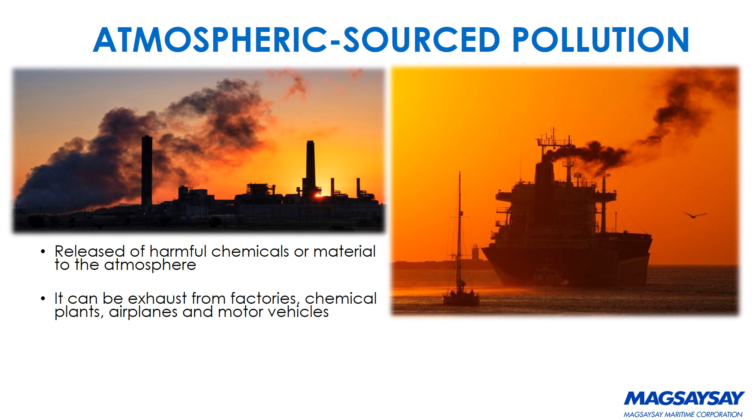Atmospheric-sourced pollution. This type of pollution releases harmful chemicals or material to the atmosphere. It can be exhaust from factories, chemical plants, airplanes and motor vehicles.

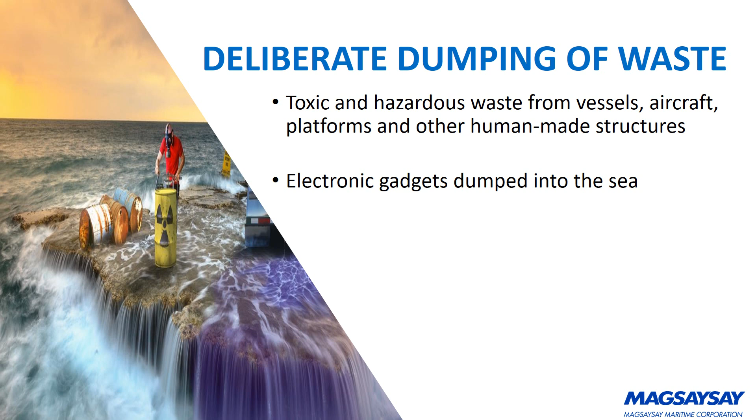Deliberate dumping of waste, toxic and hazardous waste from vessels, aircraft, platforms and other human-made structures. Electronic gadgets dumped into the sea.

Noise pollution: environmental noise that interferes with the ability of marine animals to hear natural sounds in the ocean. This can be from military sonar, oil exploration, and industrial commercial shipping.

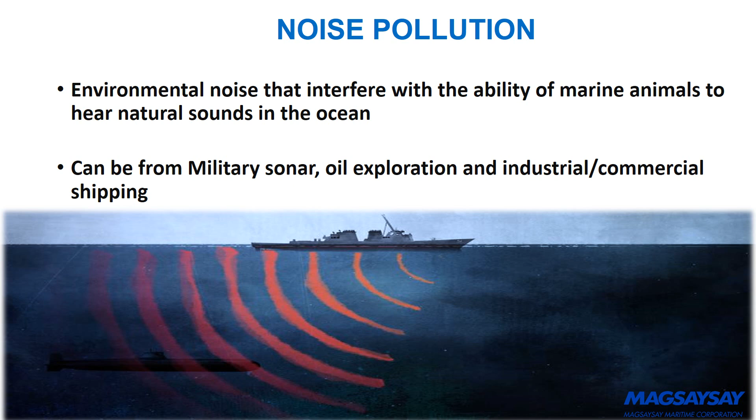Ship-sourced marine pollution. There are two types of ship-sourced marine pollution. First is operational pollution, which for example comes from routine tank cleaning operations. Next is accidental pollution, which is the result of sudden events, independent of human will. It may, for example, occur following the rupture of a pipeline, a fire, or a shipwrecking.

Where does the operational ship-sourced marine pollution come from? It may come from the following sources: atmospheric discharges from ship's fuel, oil from machinery and cargo spaces, chemical and other harmful substances carried as cargo, sewage, toxic substances carried in package form, and garbage.

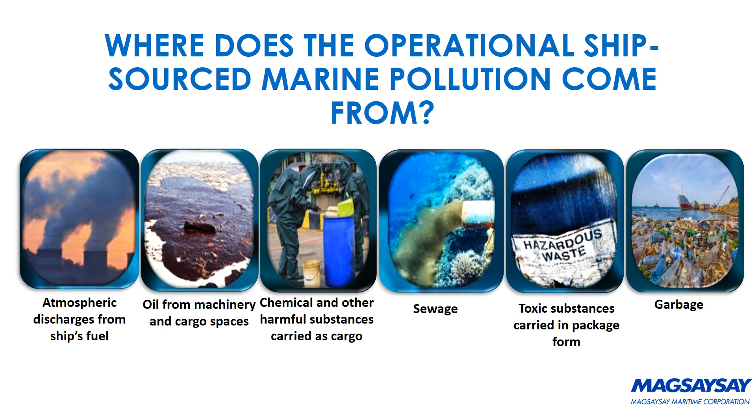How do countries address ship-sourced pollution? Governments of the different countries in the world, through the International Maritime Organization, have created the International Convention for the Prevention of Pollution from Ships in 1973, as amended by the Protocol of 1978, or Marpol 73/78.

Marpol Convention. Marpol, a short form for marine pollution, is also the name of an international convention for the prevention of environmental pollution from any sea-going vessel. Better known as Marpol 73/78.

The agreement came into effect on the 2nd of October 1983 at the headquarters of the International Maritime Organization, or IMO, in London, England. The main aim for implementing Marpol was to minimize the pollution of the seas, which mainly occurs because of dirty oil, exhaust gases, and hazardous chemicals from ships.

The Marpol Convention provides utmost importance to the marine environment by completely eliminating the usage of any type of substances that can prove harmful to the environment.

Marpol Convention. The convention includes regulations aimed at preventing and minimizing pollution from ships, both accidental pollution and that from routine operations. It currently includes 6 technical annexes.

Annex 1: Prevention of pollution by oil. Annex 2: Control of pollution by noxious liquid substances in bulk. Annex 3: Pollution by harmful substances carried by sea in packaged form. Annex 4: Pollution by sewage from ships. Annex 5: Pollution by garbage from ships. Annex 6: Air pollution from ships.

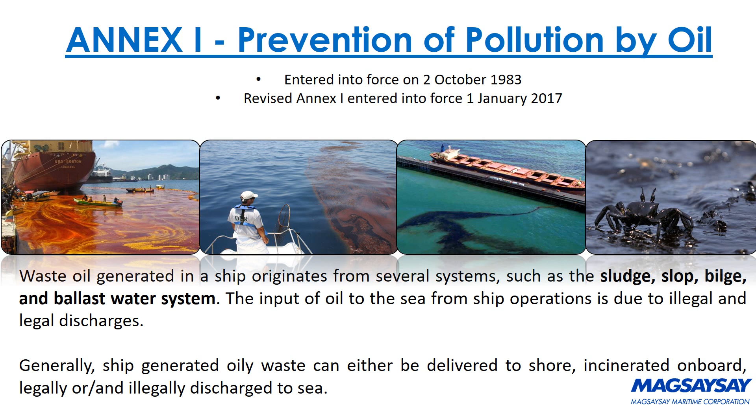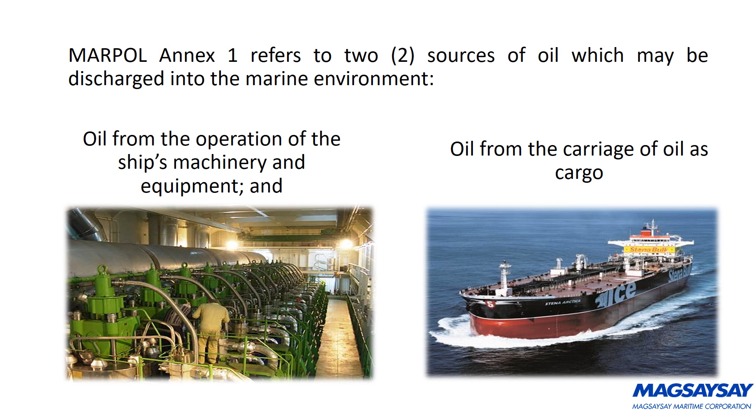Marpol Annex 1 refers to two sources of oil which may be discharged into the marine environment: oil from the operation of the ship's machinery and equipment, and oil from the carriage of oil as cargo. Oil from routine ship's operations discharge requirements.

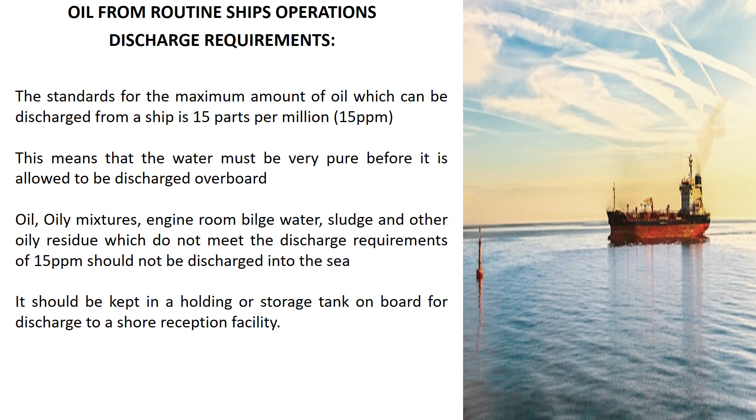The standard for the maximum amount of oil which can be discharged from a ship is 15 parts per million, or 15 ppm. This means the water must be very pure before it is allowed to be discharged overboard. Oil, oily mixtures, engine room bilge water, sludge, and other oily residue which do not meet the discharge requirement of 15 ppm should not be discharged into the sea.

It should be kept in a holding or storage tank on board for discharge to a shore reception facility. Oil filtering equipment, also known as oily water separators (OWS): any ship of 400 gross tonnage and above shall be fitted with oil filtering equipment, of a design approved by the administration. It shall be provided with an alarm arrangement to indicate when the required level cannot be maintained, and any discharge of oily mixtures is automatically stopped when the oil content of the effluent exceeds 15 parts per million.

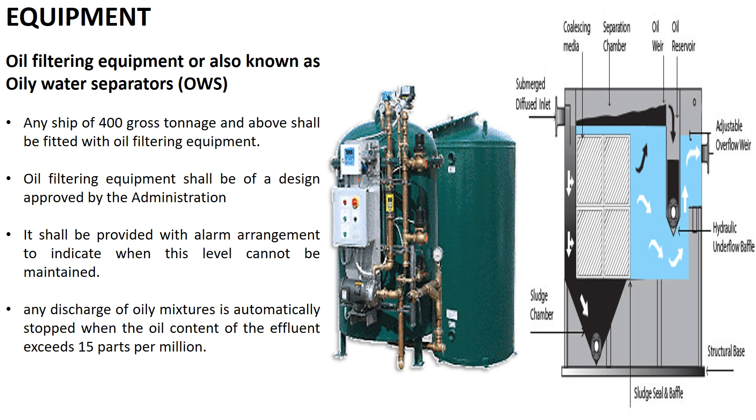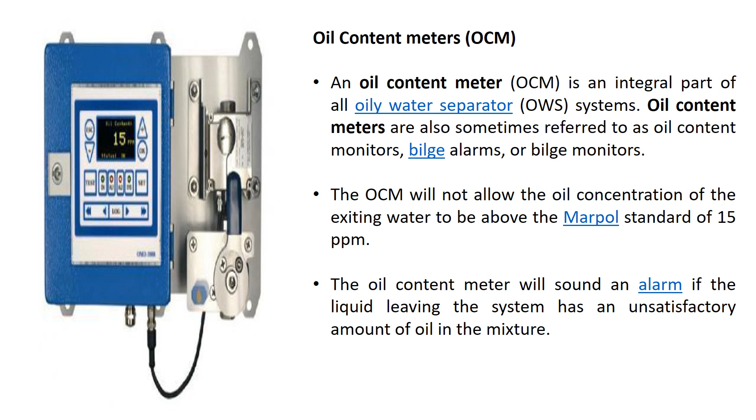Oil content meters (OCM): an oil content meter is an integral part of all oily water separator systems. OCM are also sometimes referred to as oil content monitors, bilge alarms, or bilge monitors. The OCM will not allow the oil concentration of the exiting water to be above the Marpol standard of 15 ppm. The oil content meter will sound an alarm if the liquid leaving the system has an unsatisfactory amount of oil in the mixture.

Shipboard Oil Pollution Emergency Plan, or SOPEP: every oil tanker of 150 gross tonnage and above, and every ship other than an oil tanker of 400 gross tonnage and above, shall carry on board a shipboard oil pollution emergency plan, approved by the administration. As a seafarer, you are required to be very familiar with your ship's SOPEP.

The procedure to be followed by the master, or other persons having charge of the ship, to report an oil pollution incident. The list of authorities or persons to be contacted in the event of an oil pollution incident. A detailed description of the action to be taken immediately by persons on board to reduce or control the discharge of oil following the incident. Procedures and point of contact on the ship for coordinating shipboard action with national and local authorities in combating the pollution.

Oil Record Book, ORB Part 1. Every oil tanker of 150 gross tonnage and above, and every ship of 400 gross tonnage and above other than an oil tanker, shall be provided with an Oil Record Book, Part 1, Machinery Space Operations. The Oil Record Book, whether as a part of the ship's official log book or otherwise, shall be in the form specified in Marpol.

The Oil Record Book, Part 1, shall be kept in such a place as to be readily available for inspection at all reasonable times. It shall be preserved for a period of 3 years after the last entry has been made. If you are working in the engine room of any ship, you must fill up the ORB1.

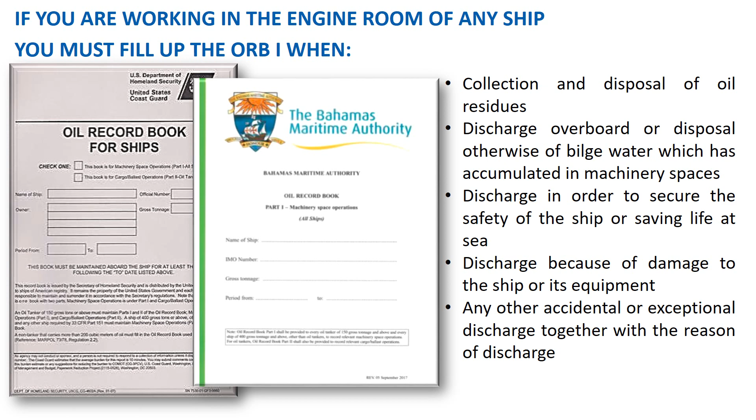Collection and disposal of oil residues. Discharge overboard, or disposal otherwise, of bilge water which has accumulated in machinery spaces. Discharge in order to secure the safety of the ship, or saving life at sea. Discharge because of damage to the ship or its equipment. Any other accidental or exceptional discharge, together with the reason for discharge.

Fully and immediately record the operation once it is completed. Have the officers in charge sign the entry once the operation is completed. Remember, it is very important to follow your ship's rules and regulations governing the OWS systems and its procedures, to ensure the oil sensing device works. If you do not know how to operate the OWS systems, ask your senior officer and your superintendent.

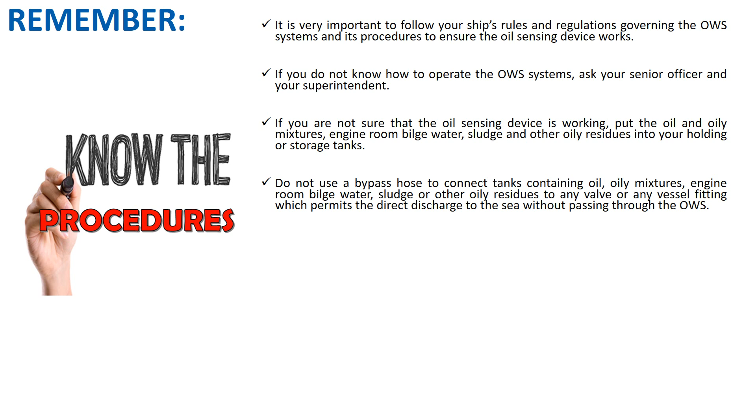If you are not sure that the oil sensing device is working, put the oil and oily mixtures, engine room bilge water, sludge and other oily residues into your holding or storage tanks. Do not use a bypass hose to connect tanks containing oil, oily mixtures, engine room bilge water, sludge, or other oily residues to any valve or vessel fitting which permits direct discharge to the sea without passing through the OWS.

Remember, the use of a bypass hose, or magic hose, is illegal. It is subject to very severe penalties. A seafarer who uses, or who consents to the use of, a bypass hose or magic hose, shall suffer the consequences, which may include revocation of his license. If you notice anybody using a bypass hose or magic hose, immediately report him to the captain. If you feel that no one is listening to you, immediately call your principal through his hotline.

Be truthful. You must record accurately and truthfully all routine ship operations involving oil in the ORB1. It is illegal to make untrue entries in the oil record book. Do not tamper with or use any means or method to distort the functioning of the oil content meter or oil detection device.

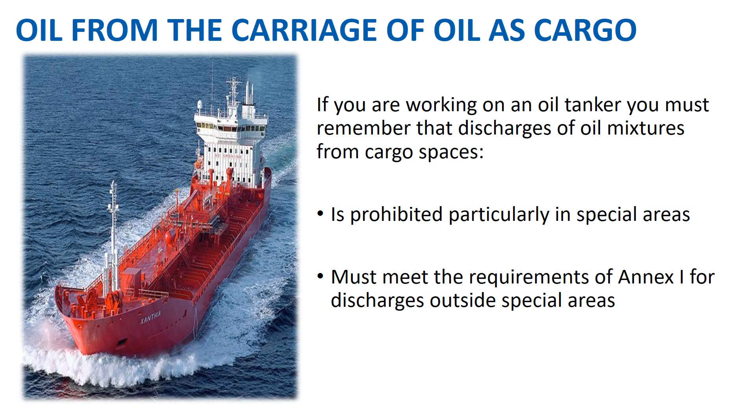If you are working on an oil tanker, you must remember that discharges of oil mixtures from cargo spaces are prohibited, particularly in special areas. Must meet the requirements of Annex 1 for discharges outside special areas.

Discharge requirements, discharges outside special areas. Any discharge into the sea of oil or oily mixtures from the cargo area of an oil tanker shall be prohibited except when all the following conditions are satisfied: the tanker is not within a special area, the tanker is more than 50 nautical miles from the nearest land, the tanker is proceeding en route, and the instantaneous rate of discharge of oil content does not exceed 30 liters per nautical mile.

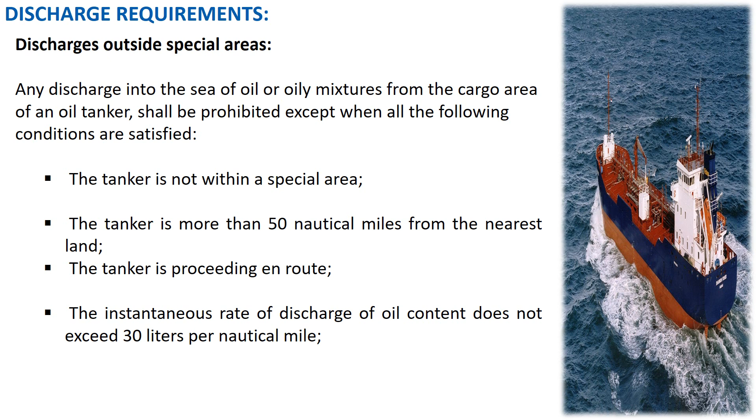Discharge requirements. Discharges outside special areas. Any discharge into the sea of oil or oily mixtures from the cargo area of an oil tanker shall be prohibited except when all the following conditions are satisfied. The total quantity of oil discharged into the sea does not exceed, for tankers delivered on or before the 31st of December 1979...

1/15,000 of the total quantity of the particular cargo of which the residue formed a part, and for tankers delivered after the 31st of December 1979, 1/30,000 of the total quantity of the particular cargo of which the residue formed a part. The tanker has in operation an oil discharge monitoring and control system, and a slop tank arrangement, as required by this annex. The provisions of this regulation shall not apply to the discharge of clean or segregated ballast.

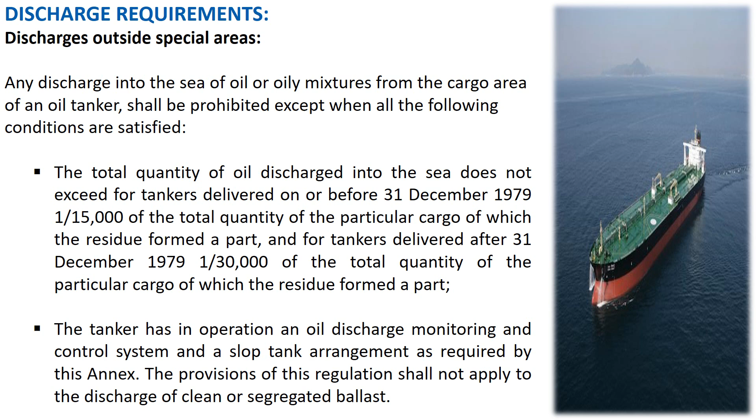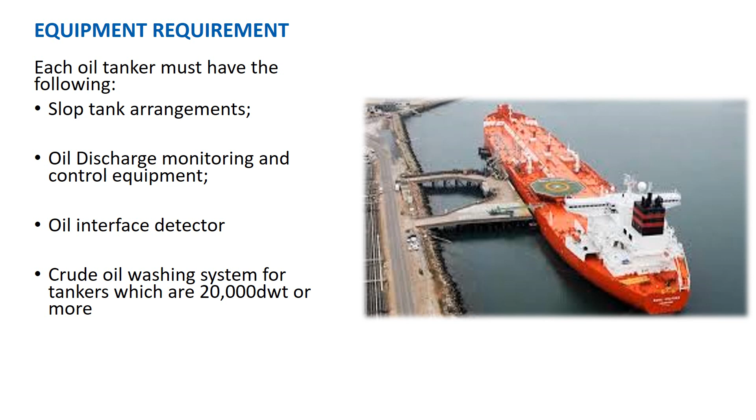Equipment requirement. Each oil tanker must have the following: slop tank arrangements, oil discharge monitoring and control equipment, oil interface detector, and crude oil washing system for tankers which are 20,000 deadweight tonnage or more.

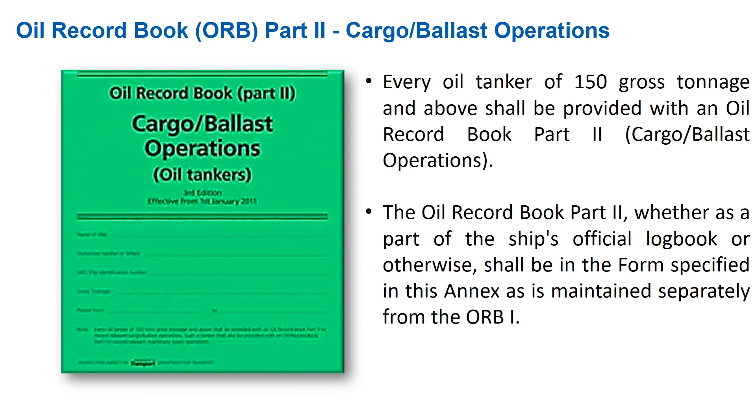Oil record book ORB Part 2: cargo or ballast operations. Every oil tanker of 150 gross tonnage and above shall be provided with an oil record book Part 2, cargo or ballast operations. The oil record book Part 2, whether as a part of the ship's official logbook or otherwise, shall be in the form specified in this annex, as it is maintained separately from the ORB1.

You must fill up the oil record book 2. The oil record book Part 2 shall be completed on each occasion, on a tank-to-tank basis if appropriate, whenever any of the following cargo or ballast operations take place in the ship:

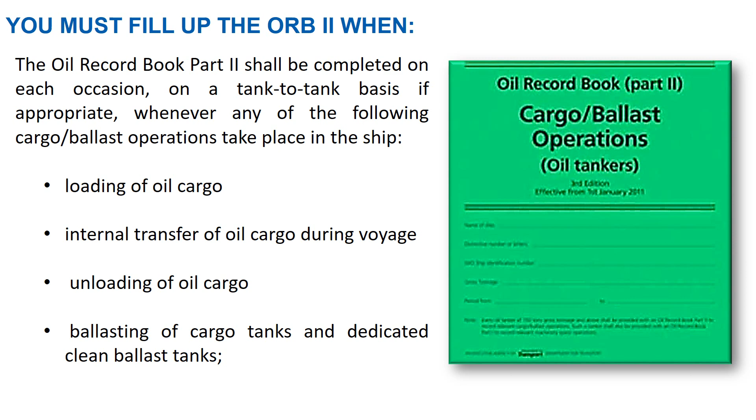Loading of oil cargo, internal transfer of oil cargo during voyage, unloading of oil cargo, ballasting of cargo tanks and dedicated clean ballast tanks, cleaning of cargo tanks including crude oil washing, discharge of ballast except from segregated ballast tanks, discharge of water from slop tanks, closing of all applicable valves or similar devices after slop tank discharge operations, closing of valves necessary for isolation of dedicated clean ballast tanks from cargo, and stripping lines after slop tank discharge operations.

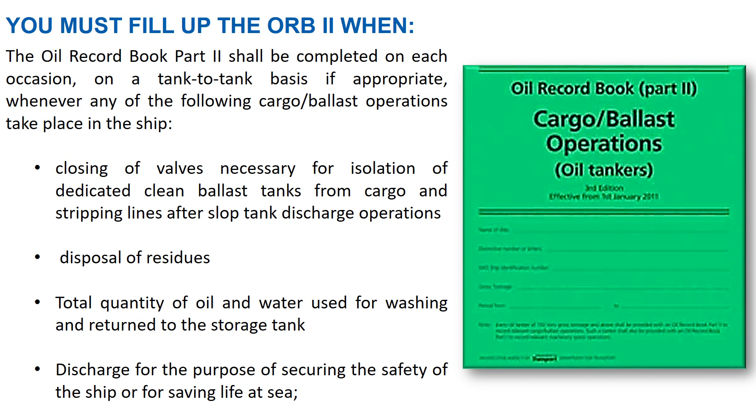Disposal of residues, total quantity of oil and water used for washing and return to the storage tank, discharge for the purpose of securing the safety of the ship or for saving life at sea, discharge resulting from damage to the ship or its equipment, any other accidental or exceptional discharge, and any failure of the oil discharge monitoring and control system.

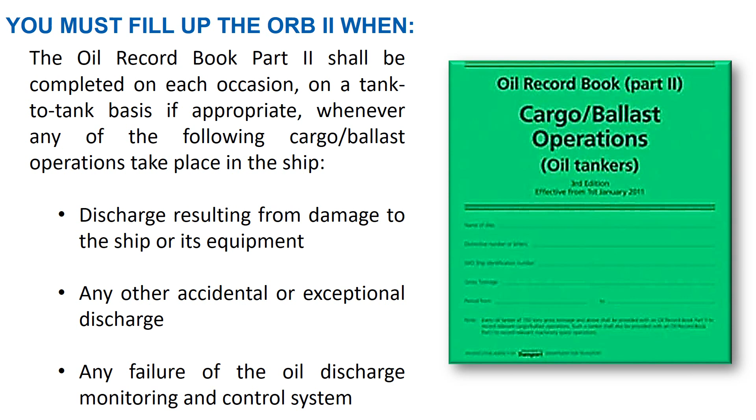Remember, each operation described in this regulation shall be fully recorded without delay in the Oil Record Book ORB Part 2, so that all entries in the book appropriate to that operation are completed. Each completed operation shall be signed by the officer or officers in charge of the operations concerned, and each completed page shall be signed by the master of the ship.

The entries in the Oil Record Book ORB Part 2 shall be at least in English, French or Spanish. Where entries in an official language of the state whose flag the ship is entitled to fly are also used, this shall prevail in case of dispute or discrepancy. Remember, you should not mix the oil and oily mixtures from cargo operations with the oil and oily mixtures from the operation of the machinery and equipment in the engine room.

Equipment: oil discharge monitoring and control system. Oil tankers of 150 gross tonnage and above shall be equipped with an oil discharge monitoring and control system approved by the administration. The system shall be fitted with a recording device to provide a continuous record of the discharge in liters per nautical mile and total quantity discharged. This record shall be identifiable as to time and date and shall be kept for at least 3 years.

The oil discharge monitoring and control system shall come into operation when there is any discharge of effluent into the sea, and shall ensure that any discharge of oily mixture is automatically stopped when the instantaneous rate of discharge of oil exceeds that permitted by this annex.

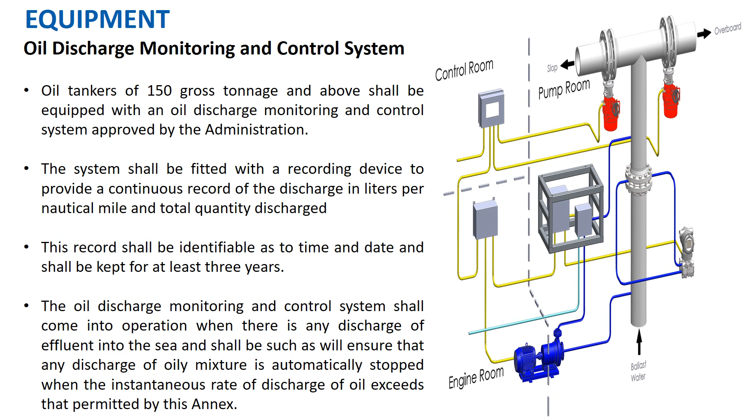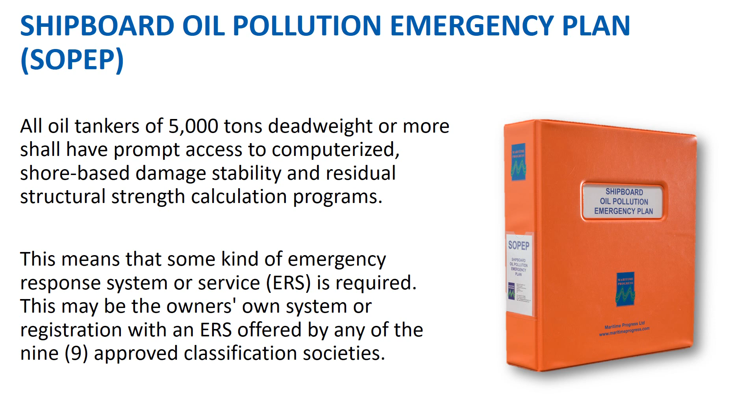Shipboard Oil Pollution Emergency Plan, or SOPEP. All oil tankers of 5,000 tons dead weight or more shall have prompt access to computerized, shore-based damage stability and residual structural strength calculation programs. This means that some kind of emergency response system or service, ERS, is required. This may be the owner's own system or registration, with an ERS offered by any of the 9 approved classification societies.

Regulation 23, Accidental oil outflow performance, applies to oil tankers delivered on or after the 1st of January 2010. This regulation specifies construction requirements to provide adequate protection against oil pollution in the event of stranding or collision.

Annex 2, Noxious Liquid Substances, NLS, entered into force on the 6th of April 1987. The Revised Annex 2 entered into force on the 1st of January 2007. It refers to noxious liquid substances which are carried as cargo on a chemical or parcel tanker.

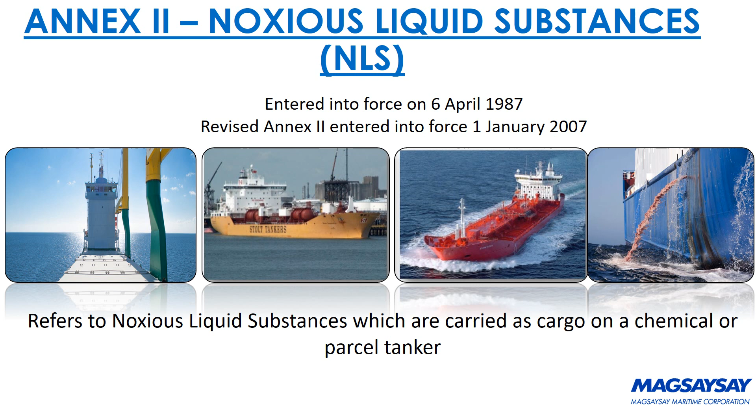If you are a seafarer working on a noxious liquid substances tanker, you are required to be very familiar with the procedures and arrangements manual of your ship. This explains the physical arrangements and operational procedures with respect to cargo handling, tank cleaning, slops handling, cargo tank ballasting and deballasting, which must be followed in accordance with the requirements of Annex 2.

Be very familiar with the Shipboard Marine Pollution Emergency Plan for noxious liquid substances carriers of your ship. This provides the procedure to be taken in case a noxious liquid substances pollution incident involving your ship occurs.

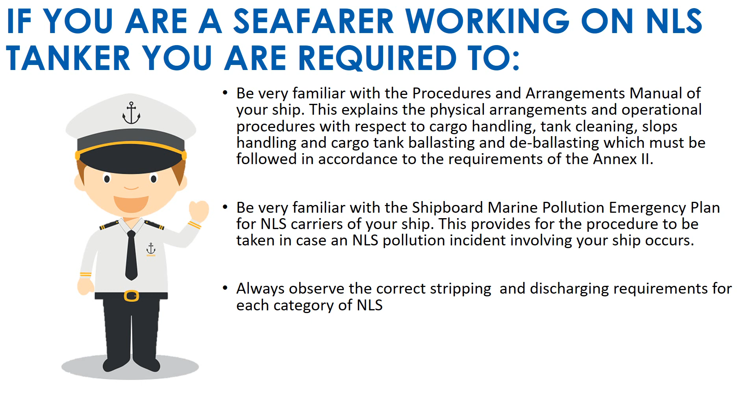Always observe the correct stripping and discharging requirements for each category of noxious liquid substances. This prohibits the discharge into the sea of any effluent containing substances falling under these categories, except when the discharge is made under conditions which are specified in detail for each category.

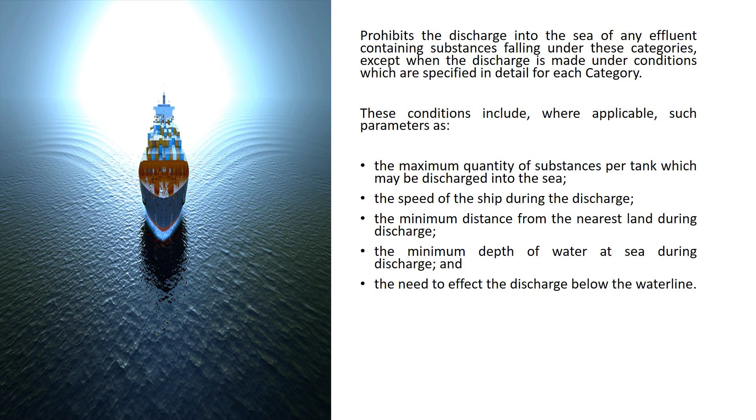These conditions include, where applicable, such parameters as the maximum quantity of substance per tank which may be discharged into the sea, the speed of the ship during the discharge, the minimum distance from the nearest land during discharge, the minimum depth of water at sea during discharge, and the need to effect the discharge below the waterline.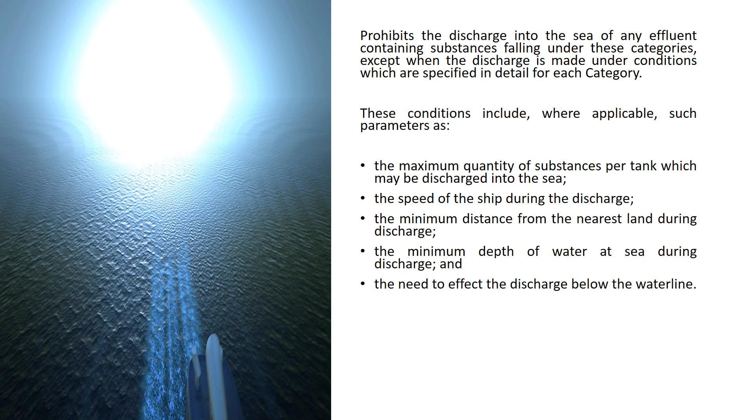Stripping requirements. There are 4 categories for stripping requirements for noxious liquid substances tankers, identified as Category X, Y, Z and OS. The table shows the requirements of each category per type of tanker. For Category X, Y and Z, they have the same requirement of 75 liters for new ships. Category X and Y have the same requirements for existing IBC and existing BCH, with 100 liters plus 50 liters tolerance and 300 liters plus 50 liters tolerance respectively, and to other ships with no carriage.

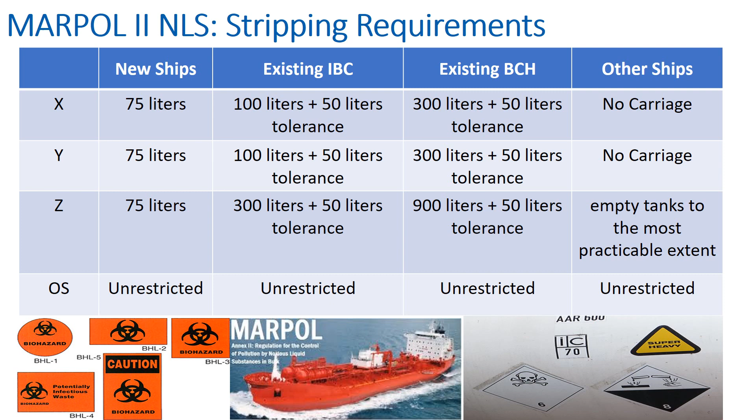Category Z has a different stripping requirement for existing IBC, with 300 liters plus 50 liters tolerance, while for existing BCH it is 900 liters plus 50 liters tolerance. On other ships, emptying tanks to the most practicable extent is the requirement. In Category OS, there are no restrictions for all types.

Discharge requirements. Category X: all substances are subject to pre-wash. Pre-wash shall be discharged to a shore reception facility. Subsequent washings may be discharged into the sea. Noxious liquid substances which, if discharged into the sea from tank cleaning or deballasting operations, are deemed to present a major hazard to either marine resources or human health, and therefore justify the prohibition of the discharge into the marine environment. Category Y: high viscosity and solidifying substances are subject to pre-wash.

Other substances are subject to most efficient stripping. Cargo residue may be discharged into the sea. Noxious liquid substances which, if discharged into the sea from tank cleaning or deballasting operations, are deemed to present a hazard to either marine resources or human health, or cause harm to amenities or other legitimate uses of the sea, therefore justify a limitation on the quality and quantity of the discharge to the marine environment.

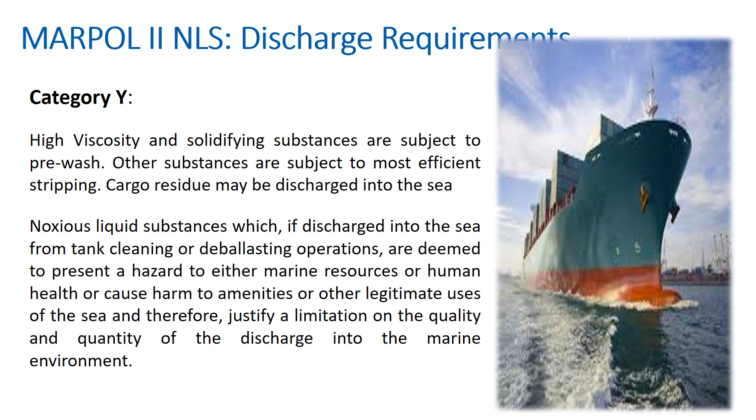Category Z: all substances are subject to the most efficient stripping. Cargo residue may be discharged into the sea. Noxious liquid substances which, if discharged into the sea from tank cleaning or deballasting operations, are deemed to present a minor hazard to either marine resources or human health, therefore justify less stringent restrictions on the quality and quantity of the discharge into the marine environment.

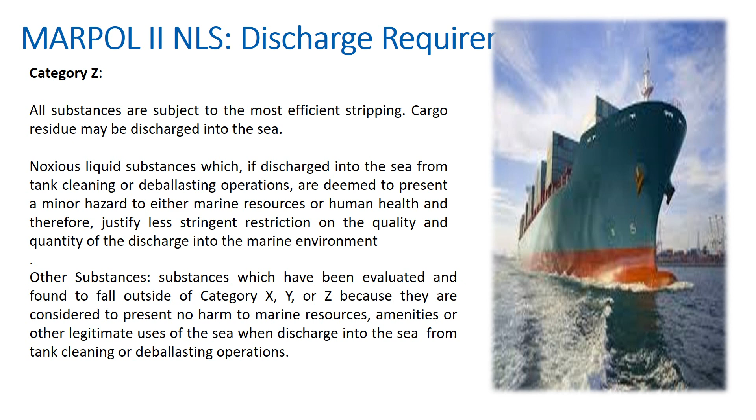Other substances which have been evaluated and found to fall outside of Category X, Y, or Z are considered to present no harm to marine resources, amenities or other legitimate uses of the sea when discharged into the sea from tank cleaning or deballasting operations. If the discharge requirements for X, Y and Z are met, the cargo residue may be discharged, provided that the ship is proceeding en route at 7 knots.

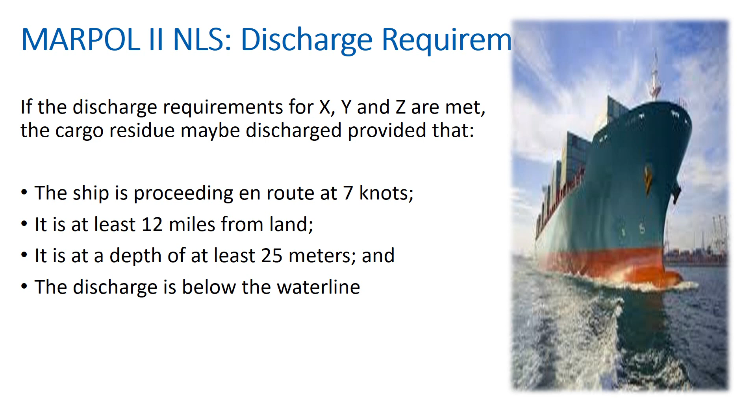It is at least 12 miles from land. It is at a depth of at least 25 meters. And the discharge is below the waterline.

Cargo Record Book (CRB). Every chemical or noxious liquid substances vessel shall be provided with a cargo record book.

The following entries for operations involving all categories of substances shall be recorded: loading of cargo, internal transfer of cargo, unloading of cargo, and mandatory pre-wash in accordance with the ship's procedures and arrangements manual.

Cleaning of cargo tanks, except mandatory pre-wash - other pre-wash operations, final wash, ventilation, etc.

Discharge into the sea of tank washings. Ballasting of cargo tanks. Discharge of ballast water from cargo tanks.

Accidental or other exceptional discharge. Control by authorized surveyors. Additional operational procedures and remarks.

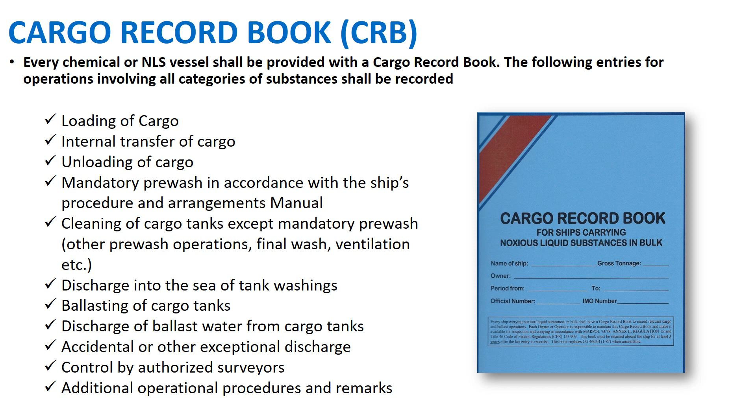Remember, each entry shall be signed by the officer or officers in charge of the operation concerned, and each page shall be signed by the master of the ship.

The CRB shall be kept in such a place as to be readily available for inspection, except in the case of unmanned ships under tow, where it shall be kept on board the ship. It shall be retained for a period of 3 years after the last entry has been made.

Shipboard Marine Pollution Emergency Plan for noxious liquid substances.

Every ship of 150 gross tonnage and above, certified to carry noxious liquid substances in bulk, shall carry on board a shipboard marine pollution emergency plan for noxious liquid substances, approved by the administration.

The plan shall consist at least of the procedure to be followed by the master, or other persons having charge of the ship, to report a noxious liquid substances pollution incident.

The list of authorities, or persons to be contacted, in the event of a noxious liquid substances pollution incident.

A detailed description of the action to be taken immediately by persons on board to reduce or control the discharge of noxious liquid substances following the incident.

And the procedures and point of contact on the ship, for coordinating shipboard action with national and local authorities, in combating the pollution. Annex 3: Prevention of Pollution by Harmful Substances in Packaged Form.

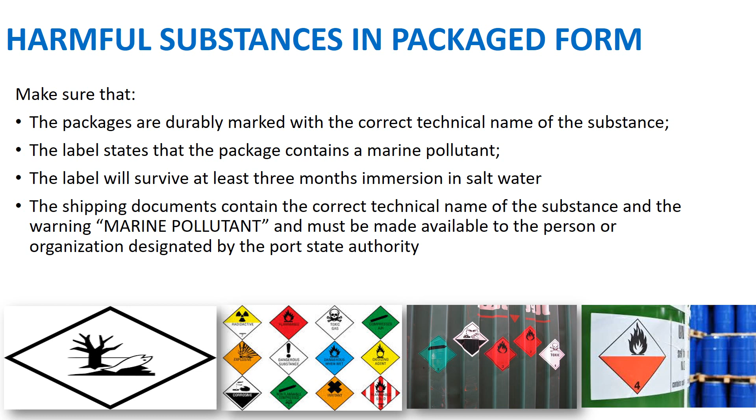Also make sure that a special list or manifest is prepared, covering the harmful substances being shipped and their location on board. A detailed stowage plan is prepared, showing their location on board.

A copy of the special manifest and detailed stowage plan must be made available before the ship's departure to the person or organization designated by the Port State Authority.

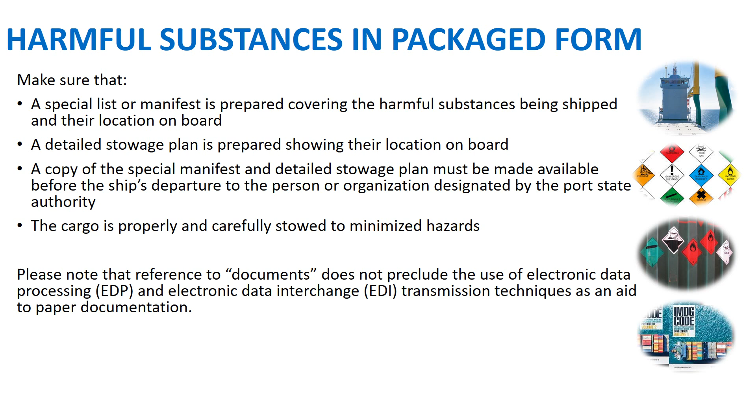The cargo is properly and carefully stowed to minimize hazards. Please note that reference to documents does not preclude the use of electronic data processing (EDP) and electronic data interchange (EDI) transmission techniques as an aid to paper documentation.

Remember, the jettisoning of a harmful substance carried in packaged form is prohibited, except if necessary for the purpose of securing the safety of the ship or saving life at sea.

Appropriate measures based on the physical, chemical and biological properties of the harmful substance must be taken to regulate any washing of leakages overboard, in accordance with Manx Shipping Notice 056, provided that compliance with those measures would not impair the safety of the ship or people on board.

In accordance with the IMDG Code, Chapter 7.9.1.1, the Department of Economic Development may issue an exemption from specific provisions of the IMDG Code concerning the transport

of a harmful substance, if it is satisfied that the alternative transport provisions are at least as effective and safe as those required by that code.

A copy of an exemption issued in accordance with paragraph 1 must accompany each consignment when offered to the carrier for transport under the terms of the exemption. A paper or electronic copy of the exemption must also be maintained on board each ship transporting a harmful substance in accordance with the exemption. The recipient of the exemption must notify other competent authorities concerned prior to any shipment covered by that exemption.

Annex 4, Sewage, entered into force on the 27th of September 2003. Annex 4 contains a set of regulations regarding the discharge of sewage into the sea from ships, including regulations regarding the ship's equipment, systems for the control of sewage discharge, the provision of facilities at ports and terminals for the reception of sewage, and requirements for survey and certification. Every seafarer must be familiar with the sewage treatment facilities of his ship. He must know how to use the equipment and properly dispose of any sewage on board.

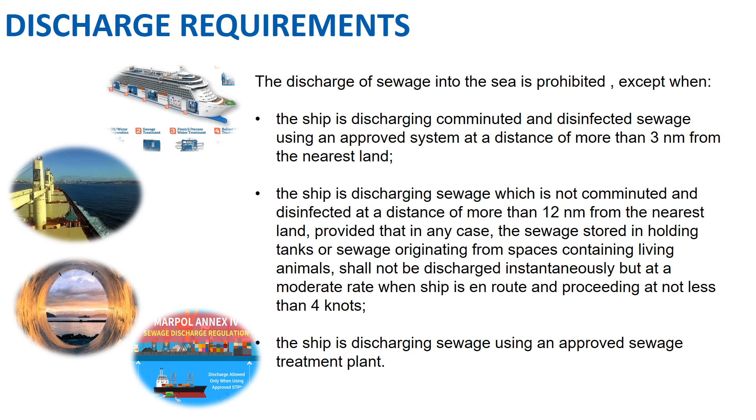Discharge requirements. The discharge of sewage into the sea is prohibited, except when the ship is discharging comminuted and disinfected sewage, using an approved system at a distance of more than 3 nautical miles from the nearest land. The ship is discharging sewage which is not comminuted and disinfected at a distance of more than 12 nautical miles from the nearest land, provided that in any case, the sewage stored in holding tanks or sewage originating from spaces containing living animals shall not be discharged instantaneously, but at a moderate rate when the ship is en route and proceeding at not less than 4 knots. The ship is discharging sewage using an approved sewage treatment plant.

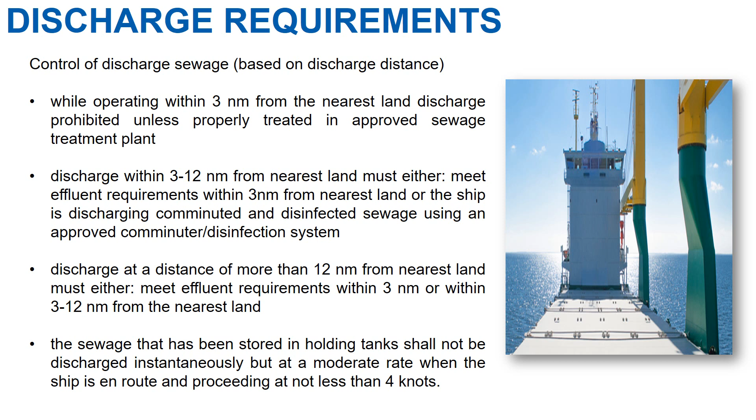Control of discharged sewage based on discharge distance. While operating within 3 nautical miles from the nearest land, discharge is prohibited unless properly treated in an approved sewage treatment plant. Discharge within 3 to 12 nautical miles from nearest land must either meet effluent requirements within 3 nautical miles from nearest land, or the ship is discharging comminuted and disinfected sewage using an approved comminuter or disinfection system. Discharge at a distance of more than 12 nautical miles from nearest land must either meet effluent requirements within 3 nautical miles, or within 3 to 12 nautical miles from the nearest land. The sewage that has been stored in holding tanks shall not be discharged instantaneously, but at a moderate rate, when the ship is en route and proceeding at not less than 4 knots.

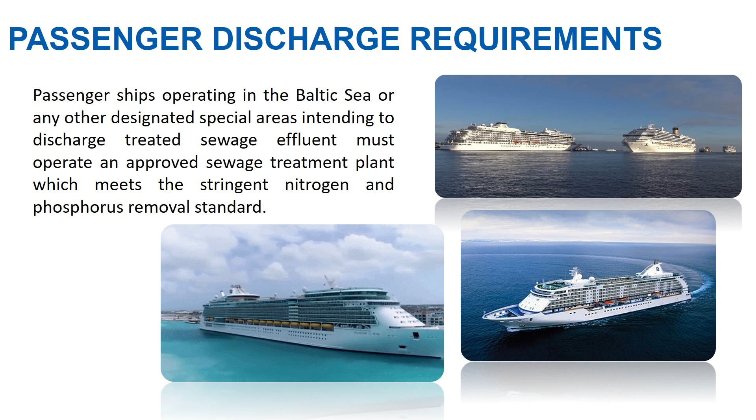Passenger discharge requirements. Passenger ships operating in the Baltic Sea, or any other designated special areas, intending to discharge treated sewage effluent, must operate an approved sewage treatment plant which meets the stringent nitrogen and phosphorus removal standard. Equipment requirements. Every ship must have a holding tank for the retention of all sewage, which has a means to visually indicate the amount of its contents; standard discharge connections, which will allow it to connect to shore reception facilities; a sewage treatment plant; a sewage comminuting and disinfecting system.

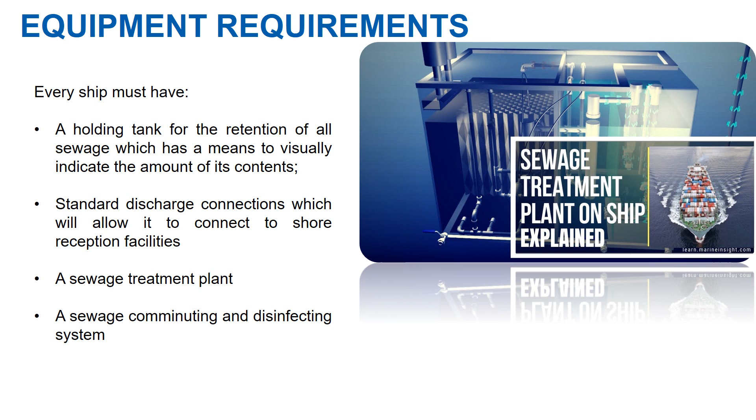Remember, the discharge of sewage into the sea is allowed when securing the safety of life for the ship, or the discharge of sewage is a result of damage to a ship or its equipment, if all reasonable precautions have been taken before and after the occurrence of the damage for the purpose of preventing or minimizing the discharge.

Annex 5, Garbage, entered into force on the 31st of December 1988. Revised Annex 5 under Regulation MEPC 70 came into effect the 1st of March 2018. Annex 5 totally prohibits the disposal of plastics anywhere into the sea, and severely restricts discharges of other garbage from ships into coastal waters and special areas. What is garbage? It refers to all kinds of food, domestic and operational waste, excluding fresh fish, generated during the normal operation of the vessel and liable to be disposed of continuously or periodically.

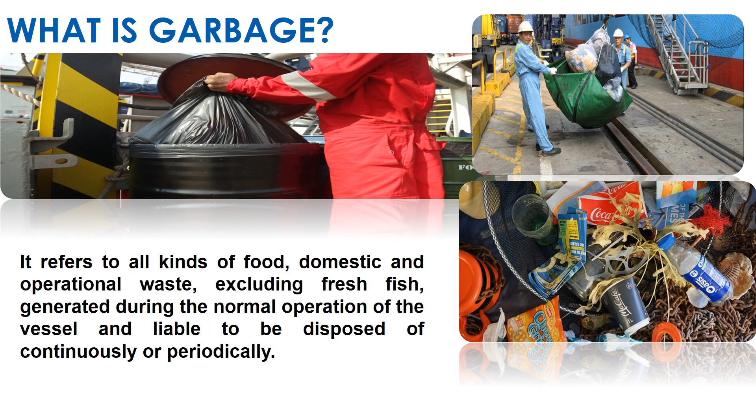Garbage management plan on board. The following ships must have a garbage management plan on board: ships which have 100 gross tonnage or above, or ships which can carry 15 persons or more. The regulation also requires every ship of 12 meters or more in length to display placards notifying passengers and crew of the disposal requirements of the regulation. The placards should be in the official language of the ship's flag state, and also in English or French for ships traveling to other states' ports or offshore terminals.

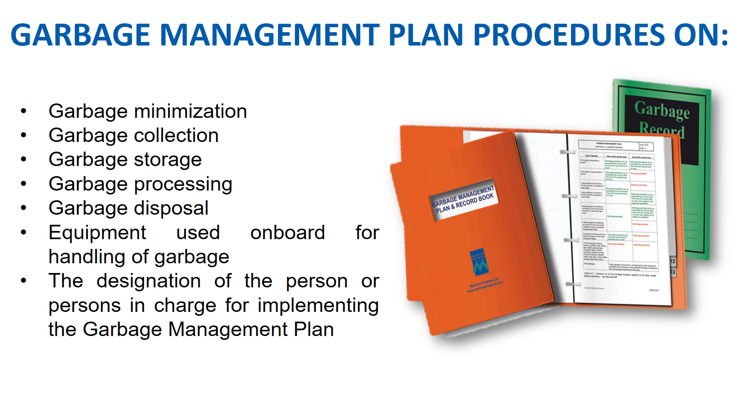Garbage management plan: procedures on garbage minimization, garbage collection, garbage storage, garbage processing, garbage disposal, equipment used on board for handling of garbage, and the designation of the person or persons in charge for implementing the garbage management plan. Garbage must be grouped into the following categories.

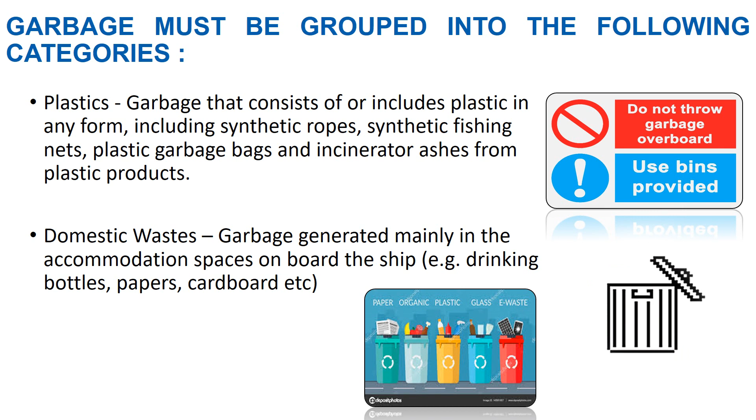Plastics: garbage that consists of, or includes, plastic in any form, including synthetic ropes, synthetic fishing nets, plastic garbage bags, and incinerator ashes from plastic products. Domestic waste: garbage generated mainly in the accommodation spaces on board the ship, e.g. drinking bottles, papers, cardboard, etc. Cooking oil: edible oil or animal fat used for the preparation or cooking of food. Food waste: spoiled or unspoiled food substances.

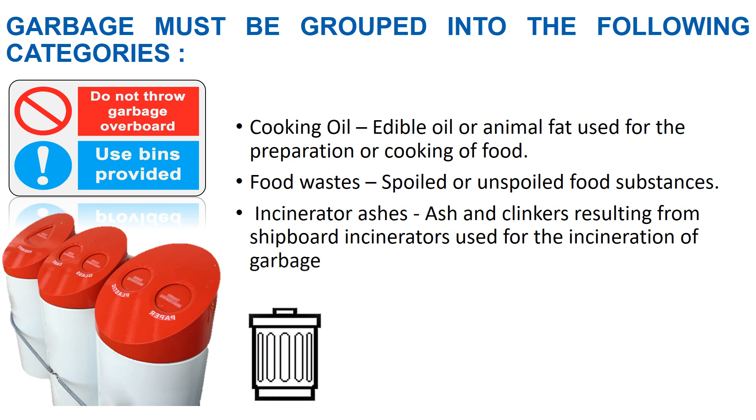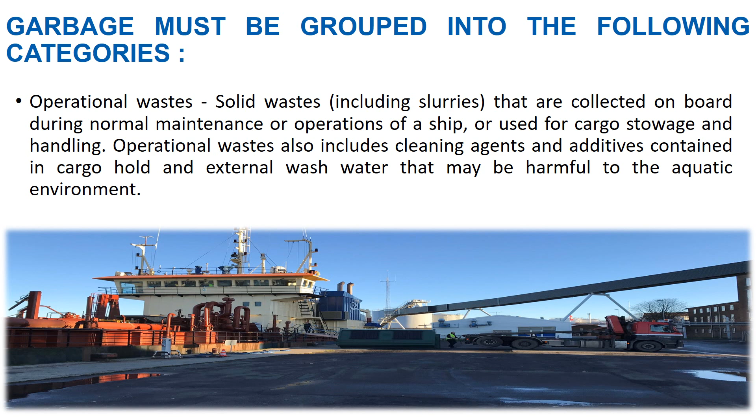Incinerator ashes: ash and clinkers resulting from shipboard incinerators used for the incineration of garbage. Operational waste: solid waste, including slurries, that is collected on board during normal maintenance or operations of a ship, or used for cargo stowage and handling. Operational waste also includes cleaning agents and additives contained in cargo hold and external wash water that may be harmful to the aquatic environment.

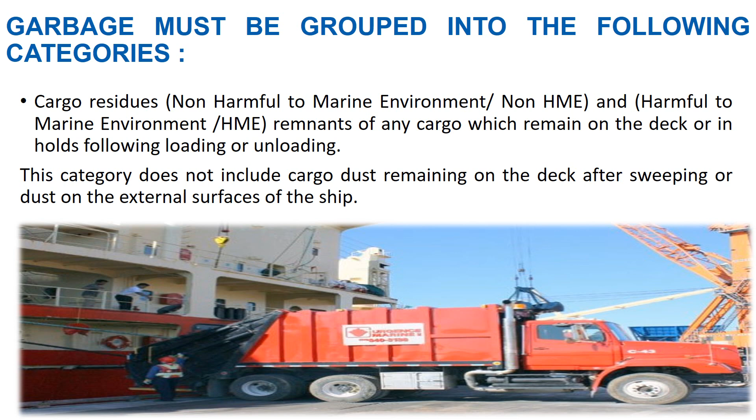Cargo residues: non-harmful to marine environment (non-HME) and harmful to marine environment (HME) remnants of any cargo which remain on the deck or in holds following loading or unloading. This category does not include cargo dust remaining on the deck after sweeping, or dust on the external surfaces of the ship. Animal carcasses: bodies of any animals that are carried on board as cargo and that die or are euthanized during the voyage.

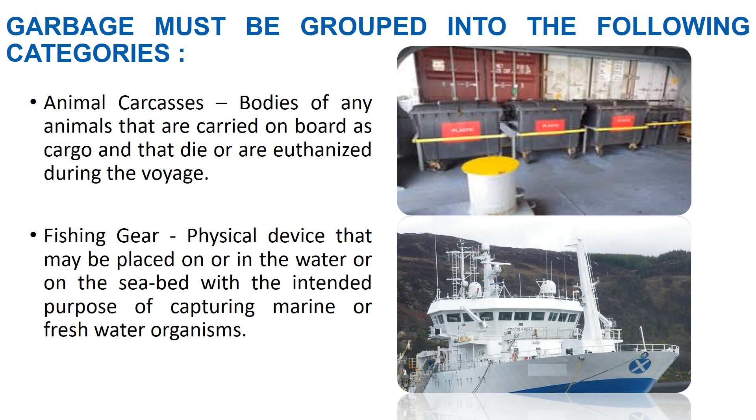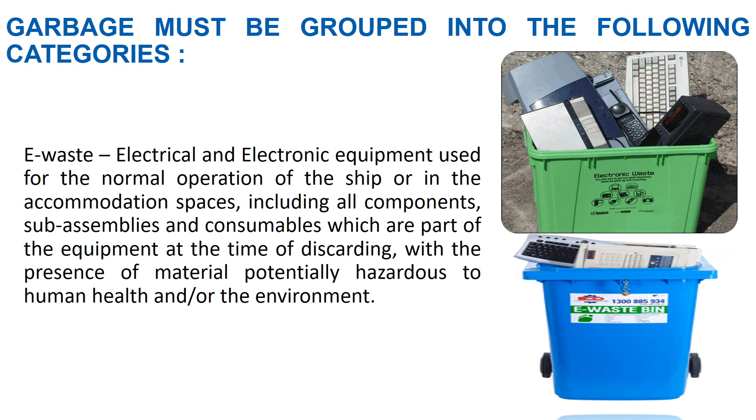Fishing gear: physical device that may be placed on or in the water, or on the seabed, with the intended purpose of capturing marine or freshwater organisms. E-waste: electrical and electronic equipment used for the normal operation of the ship or in the accommodation spaces, including all components, sub-assemblies and consumables which are part of the equipment at the time of discarding, with the presence of material potentially hazardous to human health and/or the environment.

Disposal of garbage outside special areas. No plastics in the oceans or seas. The disposal into the sea of all plastics, including but not limited to synthetic ropes, synthetic fishing nets, plastic garbage bags, and incinerator ashes from plastic products, which may contain toxic or heavy metal residues, is prohibited. The disposal into the sea of the following garbage shall be made as far as practicable from the nearest land, but in any case is prohibited if the distance from the nearest land is less than 25 nautical miles.

Dunnage, lining and packing materials which will float. 12 nautical miles: food wastes and all other garbage, including paper products, rags, glass, metal, bottles, crockery, and similar refuse. 3 nautical miles: paper products, rags, glass, metal, bottles, crockery, and similar refuse which has passed through a comminutor or grinder.

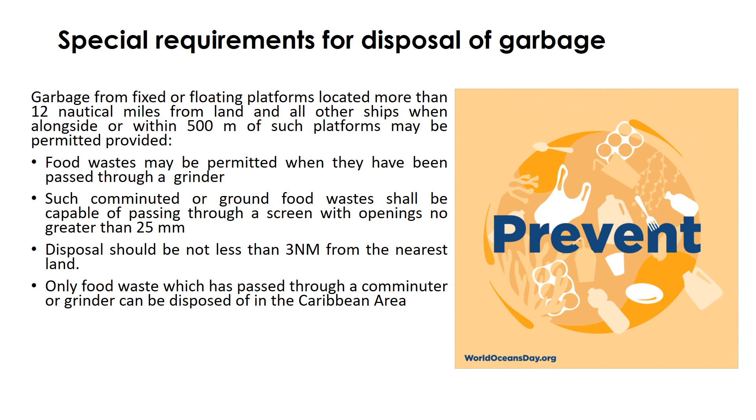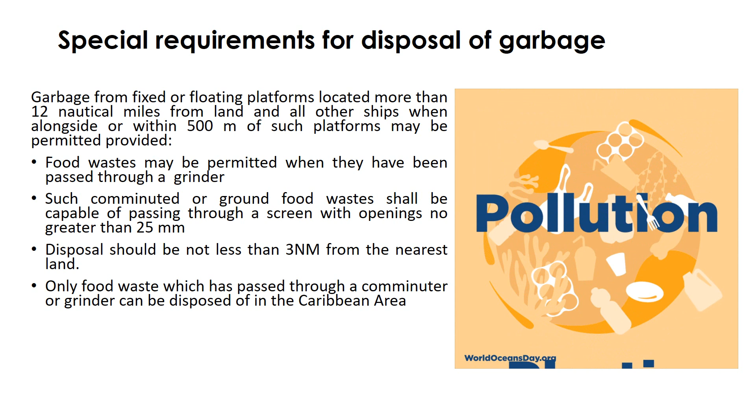Special requirements for disposal of garbage. Garbage from fixed or floating platforms located more than 12 nautical miles from land, and all other ships when alongside or within 500 meters of such platforms, may be permitted. Provided: food wastes may be permitted when they have been passed through a grinder. Such comminuted or ground food wastes shall be capable of passing through a screen with openings no greater than 25 millimeters. Disposal should be not less than 3 nautical miles from the nearest land. Only food waste which has passed through a comminutor or grinder can be disposed of in the Caribbean area.

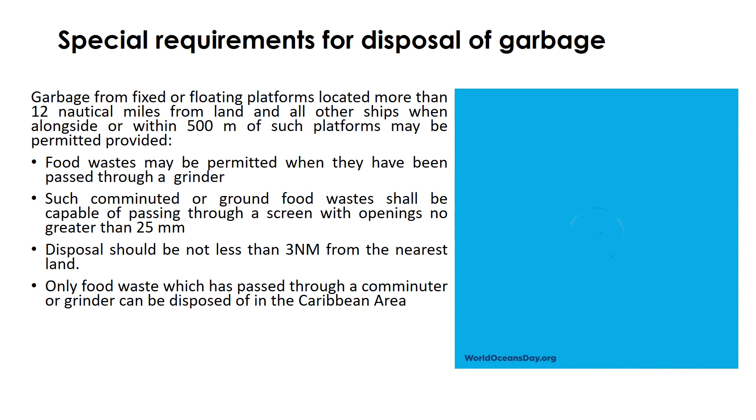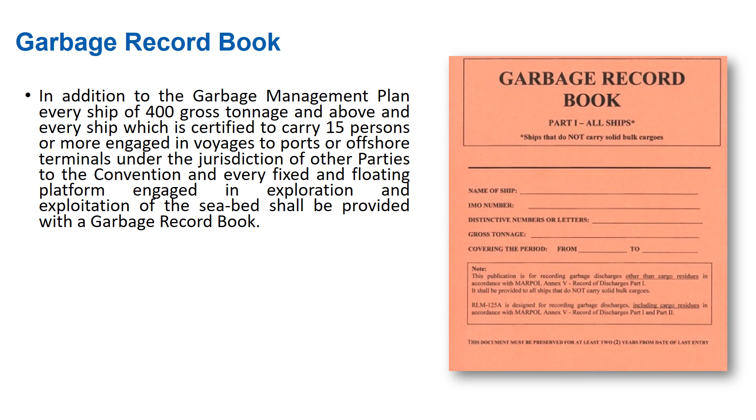Maintaining the garbage record book. Each discharge operation or completed incineration shall be recorded in the garbage record book and signed for on the date of the incineration or discharge by the officer in charge. Each completed page of the garbage record book shall be signed by the master of the ship. Where the entries are also made in an official language of the state whose flag the ship is entitled to fly, these entries shall prevail in case of a dispute or discrepancy.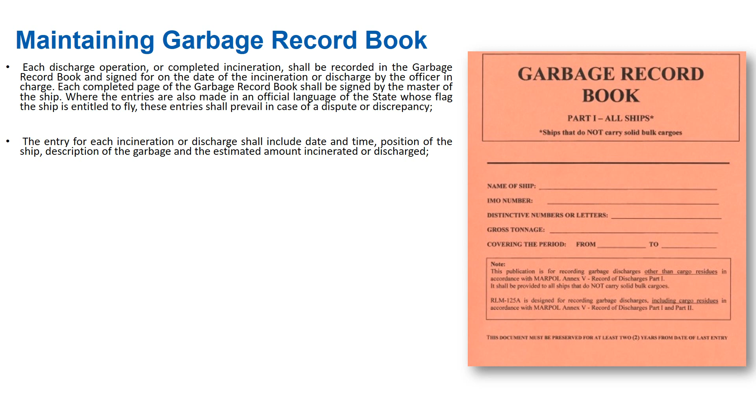The entry for each incineration or discharge shall include date and time, position of the ship, description of the garbage, and the estimated amount incinerated or discharged. The garbage record book shall be kept on board the ship, in such a place as to be available for inspection in a reasonable time. This document shall be preserved for a period of 2 years after the last entry is made. In the event of discharge, escape or accidental loss referred to in Regulation 6 of this annex, an entry shall be made in the garbage record book of the circumstances of, and the reasons for, the loss.

Remember, the disposal of garbage from a ship, necessary for the purpose of securing the safety of a ship and those on board or saving life at sea, or the escape of garbage resulting from damage to a ship or its equipment, provided all reasonable precautions have been taken before and after the occurrence of the damage for the purpose of preventing or minimizing the escape, or the accidental loss of synthetic fishing nets, provided that all reasonable precautions have been taken to prevent such loss.

Annex 6, Air Pollution from Ships. Entered into force on the 19th of May 2005. Revised Annex 6 entered into force the 1st of July 2010. Limits the main air pollutants contained in ships' exhaust gas, including sulfur oxides and nitrous oxides, and prohibits deliberate emissions of ozone-depleting substances. MARPOL Annex 6 also regulates shipboard incineration and the emissions of volatile organic compounds from tankers.

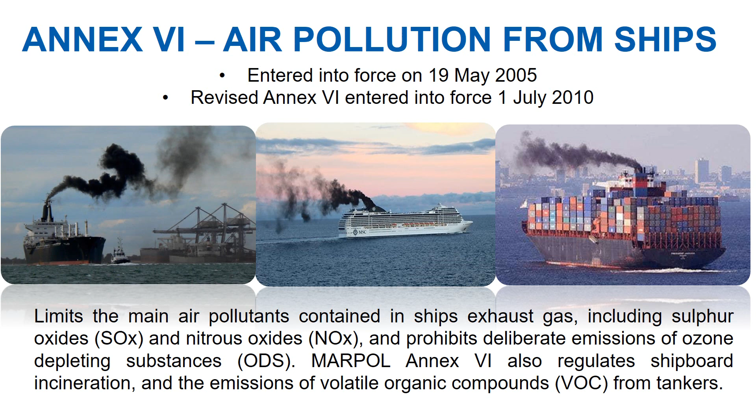Requirements of Annex 6. The ship's engine and equipment must comply with the NOx Technical Code. The sulfur content of any fossil fuel used by the ship must meet the requirements of the annex. The ship must purchase fuel only from the accredited local fuel suppliers of the port state. The ship must not engage in any deliberate emission of ozone-depleting substances, particularly chlorofluorocarbons or CFCs.

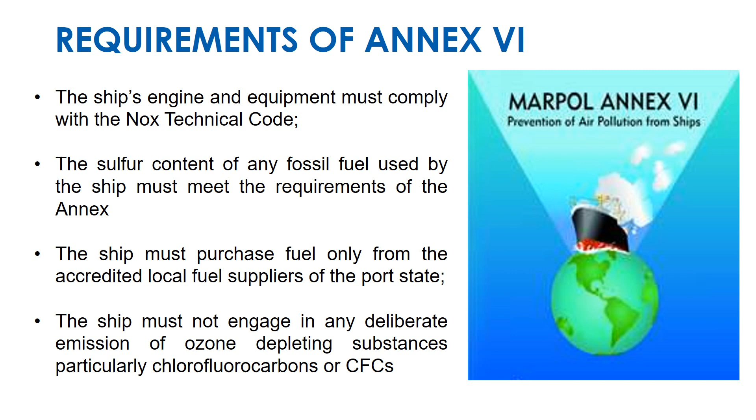Prohibited incineration. The following are prohibited: cargo residues of oil, noxious liquid substances, harmful substances in package form and related packing material, polychlorinated biphenyls (PCBs), garbage which contains more than traces of heavy metals, refined petroleum products containing halogen compounds, polyvinyl chlorides (PVCs), unless the ship's incinerator is IMO type approved for the purpose.

Requirements for the purchase of fuel oil. Purchase fuel oil only from the port state control approved suppliers. Make sure that every delivery of fuel oil is covered by a bunker delivery note. Make sure that the fuel supplier provides a sample of the fuel oil covered by the bunker delivery note. Keep the bunker delivery note on board the ship, and retain the copy for a period of 3 years after delivery on board. Keep the sample fuel oil together with the bunker delivery note.

Ensure that the sample is sealed and signed by the supplier's representative and the master, or officer in charge of bunker operations, on completion of the bunkering operations. Retain the sample under the ship's control until the fuel oil is substantially consumed, but in no case less than a period of 12 months from delivery.

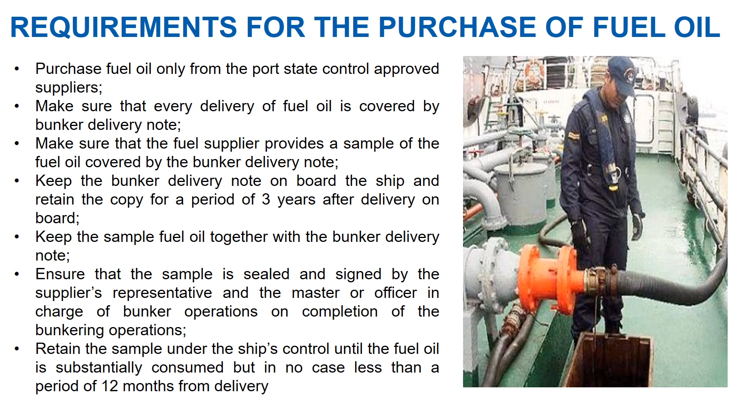Special Areas, MARPOL Annex 1 to 6. Special Areas means a sea area where, for recognized technical reasons in relation to its oceanographical and ecological condition and to the particular character of its traffic, the adoption of special mandatory methods for the prevention of sea pollution by oil, noxious liquid substances, and garbage is required.

Annex 1 Oil Special Areas: Mediterranean Sea, Baltic Sea, Black Sea, Red Sea, Gulfs Area, Gulf of Aden, Antarctic Area, Northwest European Waters, Oman Area of the Arabian Sea, Southern South African Waters. Annex 2, Noxious Liquid Substances, Special Areas: Antarctic Area. Annex 4 Sewage, Special Areas: Baltic Sea.

Annex 5 Garbage, Special Areas: Mediterranean Sea, Baltic Sea, Black Sea, Red Sea, Gulf area, North Sea, Antarctic area south of latitude 60 degrees south, Wider Caribbean region, including the Gulf of Mexico and the Caribbean Sea. Annex 6 Prevention of air pollution by ships. Emission control areas: Baltic Sea, North Sea, North American emission control areas, United States Caribbean Sea emission control areas.